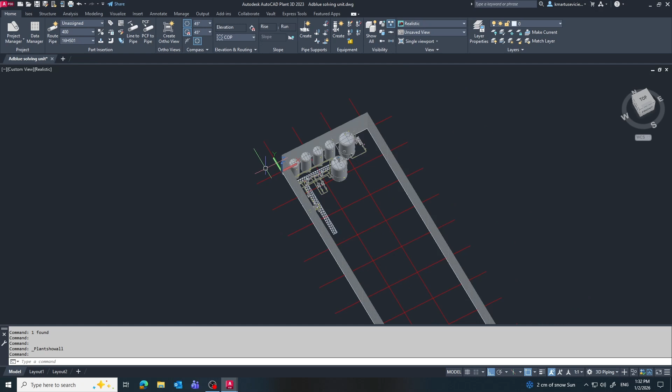Hello, in this video, we finalize the urea handling part of the AdBlue system. I'll add a urea hopper with a double screw conveyor, adjust filling nozzles based on the 3D model, and show one simple but very useful trick to precisely place nozzles in your layout.

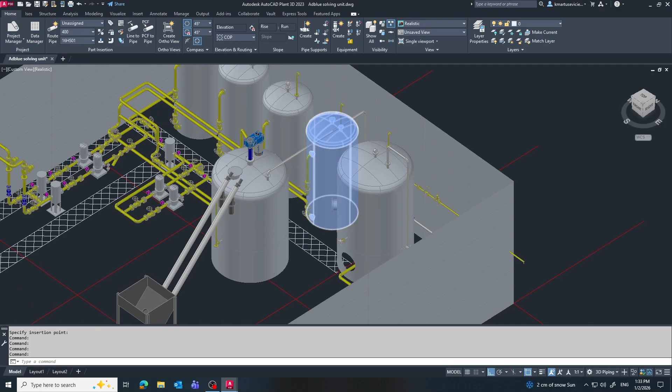Now let's insert our hopper into the model. You can also create this equipment yourself. Simply build a hopper-type tank using solids, then add 2 cylinders and rotate them at a 45-degree angle to represent the screw outlets. In our case, the most important part is the filling nozzles connected to the reactor. The remaining elements are added mainly for visualization and layout clarity, not for detailed manufacturing.

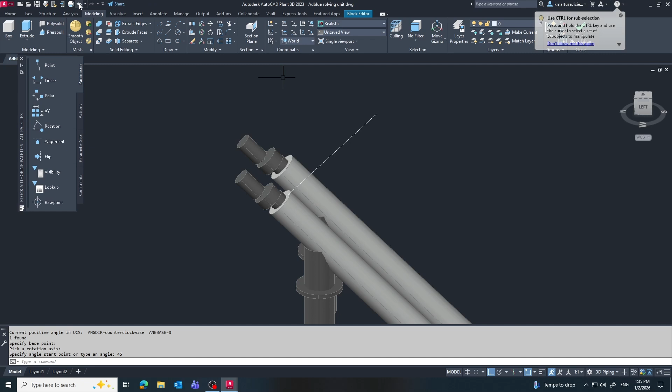Our hopper is created as a block, so I'll enter block editing mode. Inside the block, I adjust and extend the screw conveyors so they reach the reactor top nozzles. This approach lets us fine-tune the geometry directly in place, ensuring proper alignment with the reactor while keeping the overall equipment structure unchanged.

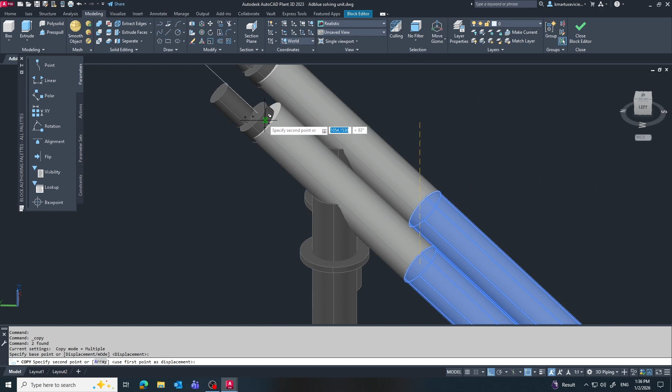Here I'm extending the screws in a rather simple, even primitive way. The goal is not perfect modeling, but to demonstrate the method I personally use to match equipment and nozzle positions in the layout. This approach is fast, practical, and works very well when the exact geometry is less important than correct alignment.

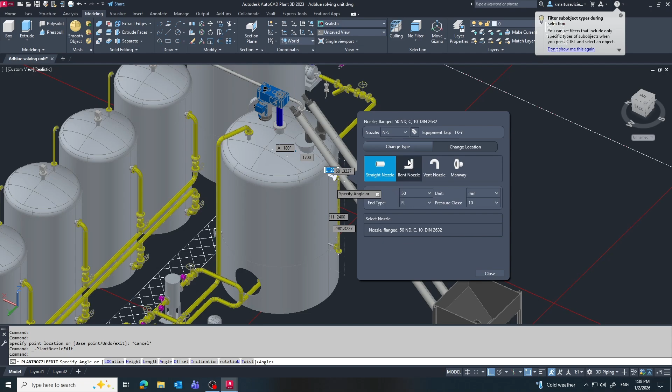Our level gauge is positioned incorrectly under the screws, so I relocate it. This is exactly the type of issue that must be solved during the project and modeling phase, not after the tanks and equipment are already manufactured and installed on site. Fixing these conflicts early saves time, money, and prevents serious problems during construction.

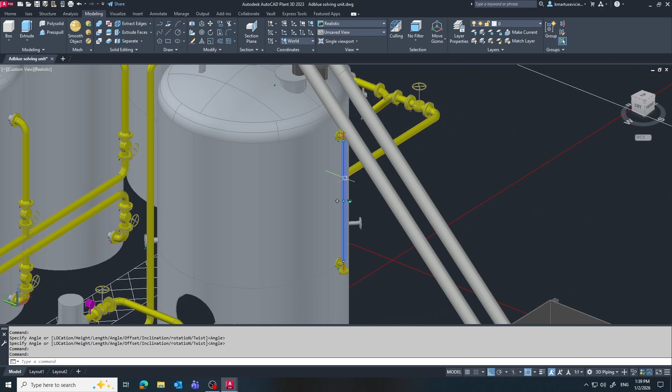And especially the engineers' nerves during construction. Resolving these issues early in the project phase avoids unnecessary stress, on-site improvisation, and last-minute design changes when everything is already in place.

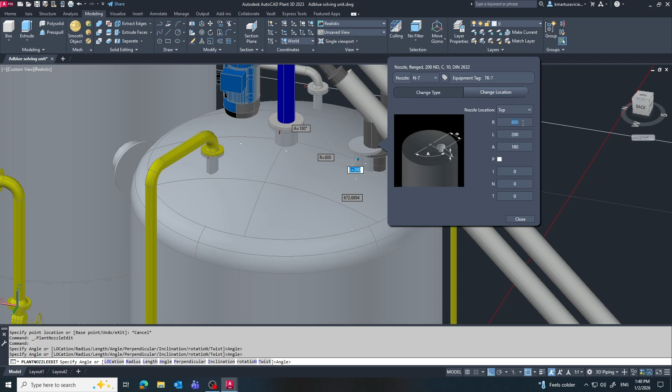Now we connect the reactor nozzles to the screws. Here the size difference and nozzle location become immediately visible. I adjust the nozzle size and shift the hopper sideways and forward. And now adjusting heights.

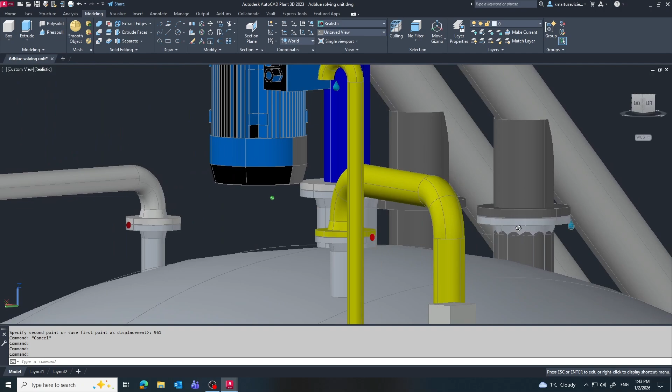One nozzle already fits perfectly. For the second nozzle, I want to show you a simple but very effective trick. First, I create an orthographic view of the reactor and screw hopper. In this view, we can perfectly measure distances without perspective distortion, which makes positioning fast and accurate.

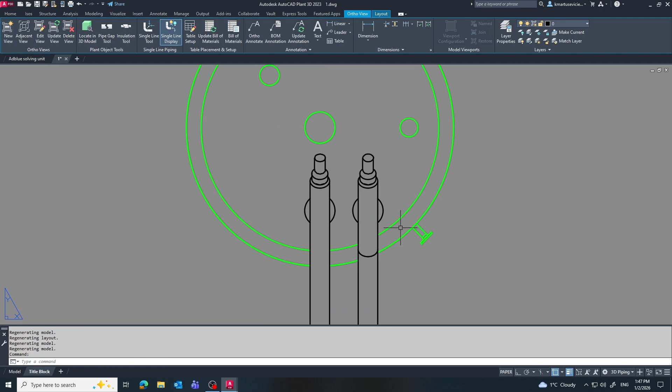In this top view, I can measure the distance from the center and the angle relative to the vertical axis. Using these 2 values, I can place the second nozzle on the reactor very accurately without any guessing. I can simply copy the nozzle and offset it a few millimeters to the side.

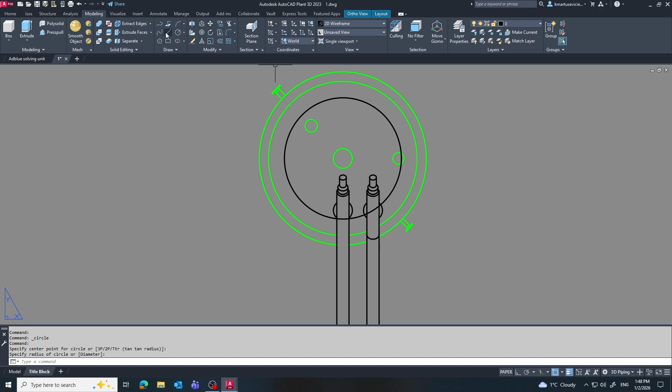The nozzle position must be defined by an exact distance from the center line and a precise angle. I measure these dimensions directly here in the orthographic view. To measure the angle, I first create a few construction lines.

These lines cross the center of the reactor and the center of the screw outlet. Using these reference lines, I can measure the angle accurately. Sometimes, it's not easy to catch the exact center point.

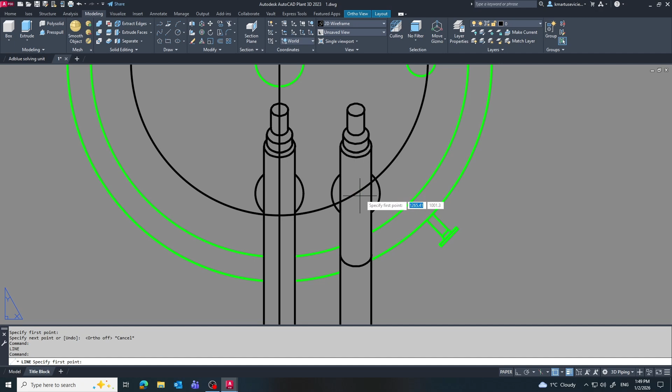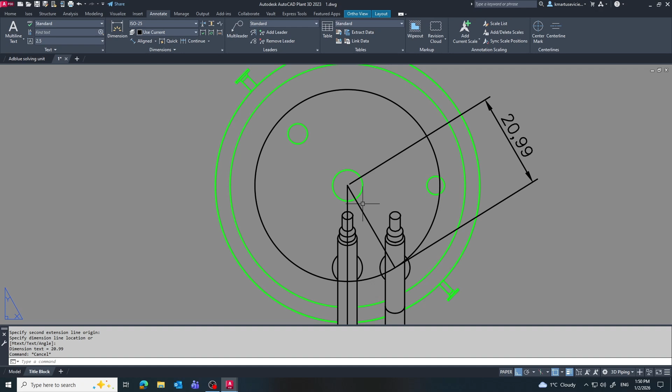One important thing to notice: if you draw additional lines in the orthographic view and then add dimensions, you need to pay close attention to what you are snapping to. If your cursor snaps to the lines you drew in the layout, the measurement will be taken from the layout, not from the model space.

This is exactly what happens here. You can see a value of 20, which is incorrect. If you want to measure real model geometry, you must snap directly to objects from the model space. So here I make sure to catch the model lines, not the layout annotations.

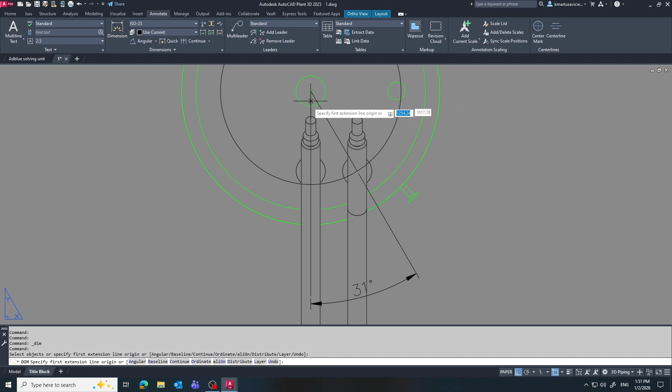How do you notice that a measurement is wrong? Usually, it's obvious from experience. If you are measuring a tank and you know its real size is not 20 or 50 millimeters, but closer to 5,000 millimeters, the mistake becomes clear immediately.

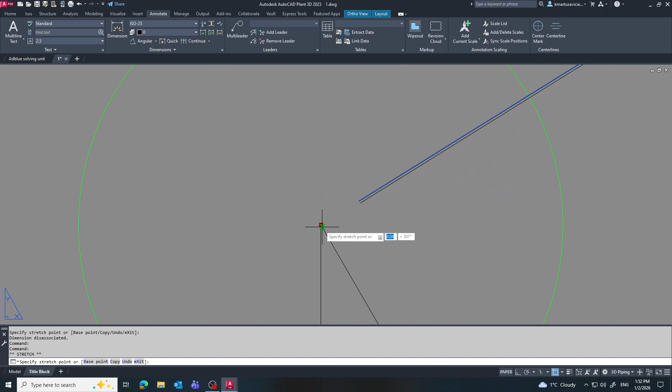When the numbers don't make physical sense, it's a good indication that something is wrong with the measurement. And these measurements are not really wrong. They appear wrong because orthographic drawings are created using a scale. You can think of the layout as a sheet of paper, and the model space as a window placed on that paper. That window is shown in a specific scale, for example 1 to 100. When you dimension layout geometry, AutoCAD measures it without applying the model scale.

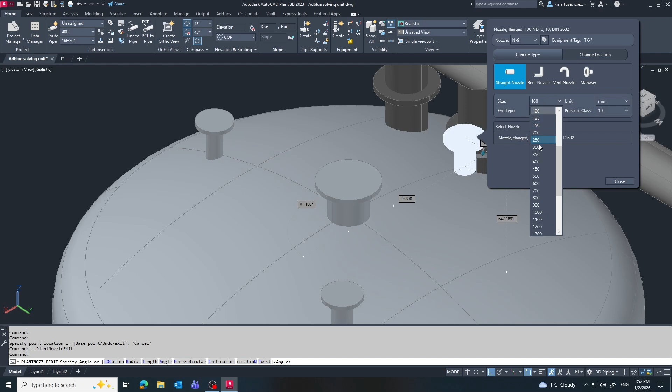That's why the numbers look incorrect. So now, back in the 3D model, we already have the angle and the distance from the center. With these values, we can place the nozzle accurately. Now I just measure the height difference and adjust nozzle height.

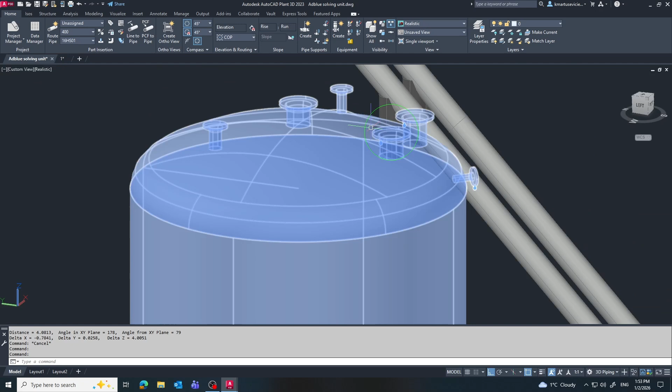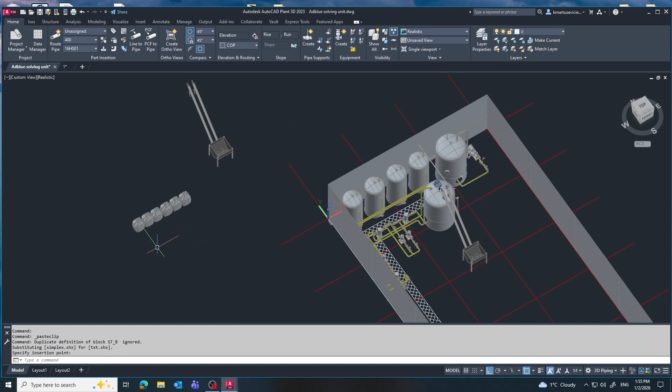And it looks like the plan worked perfectly. Here you can see the complete AdBlue system with the urea conveyors. One more 3D element here, the urea big bags.

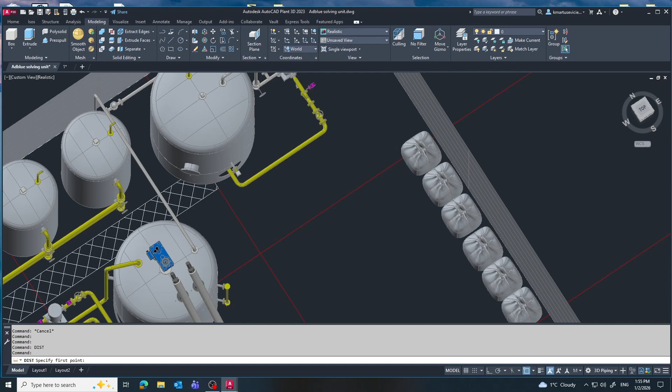It looks like we have plenty of free space, unlike real project sites, where free space is almost a miracle. We have to remember that big bags are not handled by hand, but by a wheel loader or a forklift. This equipment needs additional space for turning, around 3.6 meters or more. So we always have to leave enough space for the loader path.

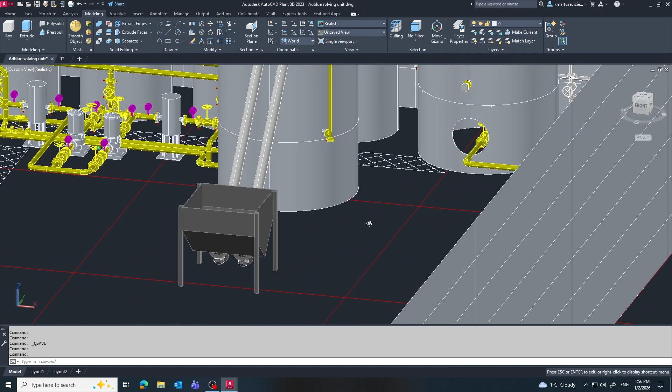One more important point about the hopper. We need access to the top of the bin for maintenance, for example, to remove urea lumps if they occur. That's why I add maintenance platforms on both sides of the hopper. This is just to visualize how it looks.